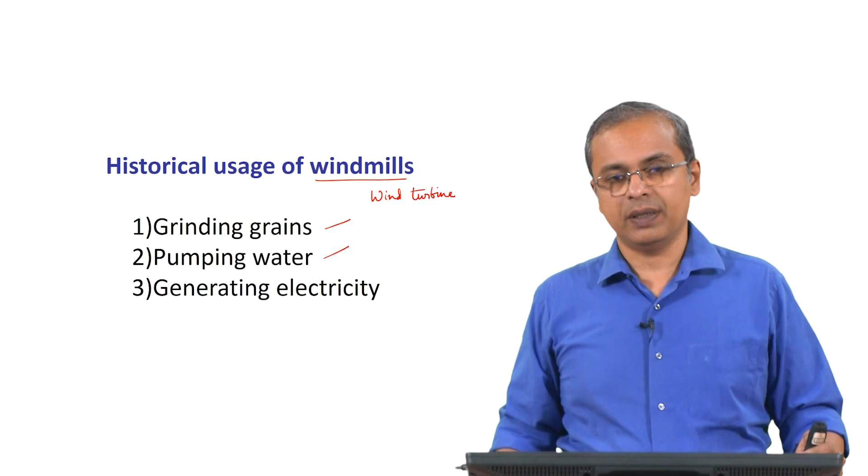In our homes, when we put pumps to pump up water from a sump underground to the tank above, because we are using electricity and we are conscious of those things, we go and switch off the pump; there is an overhead tank, we want to make sure that it does not overflow. If you just have a windmill to do that, and people can install small windmills on top of their house, it will take the water from the underground sump to the overhead tank without having to use any electricity.

If you just leave it on, it will just pump all the water out, and you may just overflow the tank. If the tank on top of your house has a lower capacity than the underground sump, which is most likely the case, then you will empty the sump, and you will be just overflowing water out the top. So, you have to be aware, because it is free, you just let it run and then it will just do its thing.

So, you have to be aware that it operates that way, and you should be ready to switch it off, so to speak, or stop it, put a brake on it and halt it. So, this is what it had been used for historically.

More recently, of course, it has been used for generating electricity, and that is why it is called the wind turbine, because eventually we have some generator there, and then you are generating electricity. So, in our context, largely we are looking at the electricity generation part of it, although notionally you could use it for any of these other purposes also. So, that is always possible.

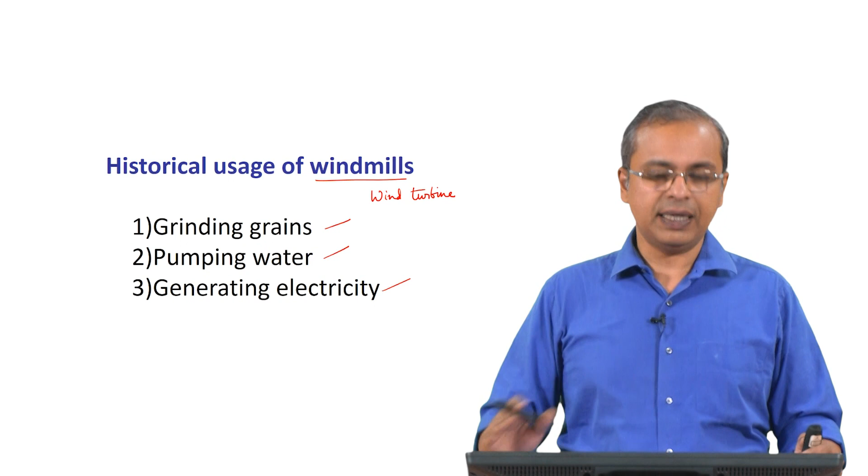Okay. So, that is the wind turbine, and these are the historical ways in which it has been used, and with that as our background, we will keep moving forward. So, what are some general requirements? Some general requirements for setting up this kind of a facility.

I mean, you may think you can set it up anywhere. Yes, indeed you can set it up anywhere. It will work with differing levels of effectiveness. So, there may be locations where it is just very minimally effective. So, if you want to get serious about it, you have to really look at the cost benefit analysis, right. You have put some cost to set up some infrastructure, what is the benefit you are getting from it. From a purely economic sense, that is the way you would look at it.

Of course, from an environmental sense, you have to look at the cost part of the equation as well as the benefit part of the equation in a much more elaborate manner. I think that is the key when people say you are ignoring environmental considerations. When you write that cost benefit kind of analysis, if you do not put cost to those things that are environmentally bad, then basically you are not doing a proper analysis. That is really what it means.

So, in the cost benefit analysis, you have to put in the idea that this is the cost for putting up this wind turbine or windmill. What is the benefit that I am getting out of it, or what is the benefit that society is getting from it. Therefore, you need to set up this windmill in such a way that it works well. If it does not work very well, then for the amount you have spent on it, the local people, maybe yourself or the people around you who are depending on the windmill, are not getting the benefit of the windmill.

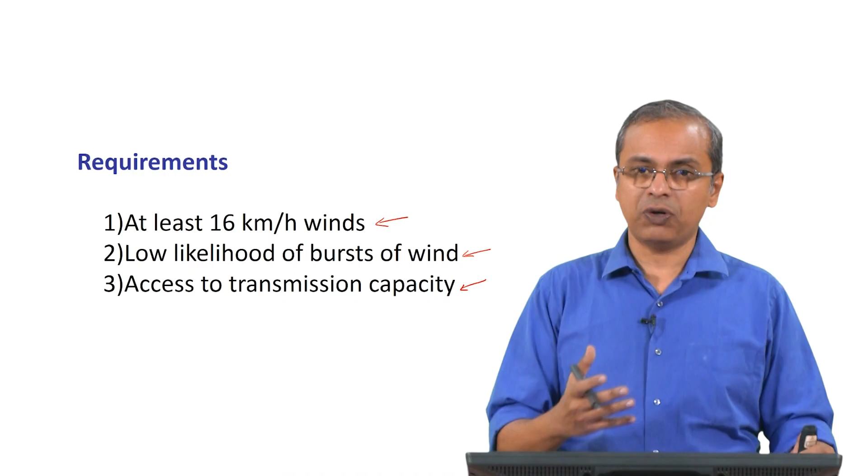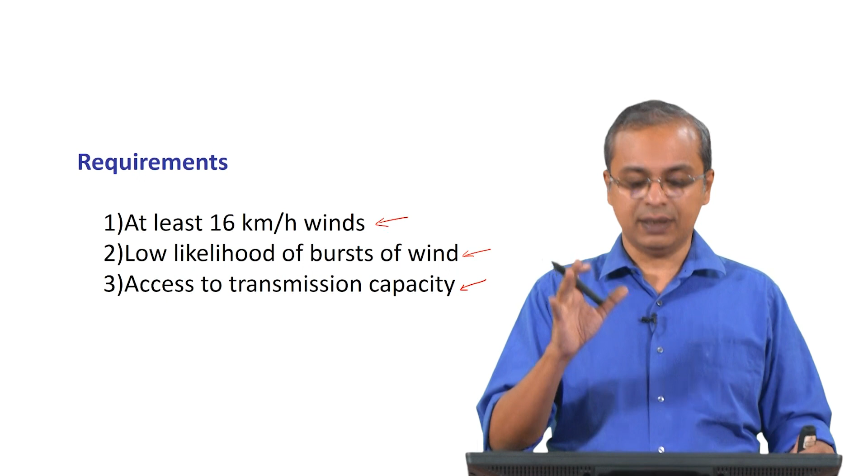So, generally in a more systematic way of going about doing this, they will look at all this analysis. They spend more than a year analyzing the wind patterns at a given location before deciding whether this location is good enough to set up windmills, because it is a fair amount of investment in the infrastructure and they would like to set it up in such a way that it really benefits everybody. Okay. So, a significant amount of site analysis is done before this windmill gets sited.

We are not too bad actually. We have our own approach to doing things. We do not force fit solutions. So, we have a certain system we follow to decide whether we are going to do something and then go about doing it, etc. We are right now the fourth largest in terms of wind power capacity and wind power generation.

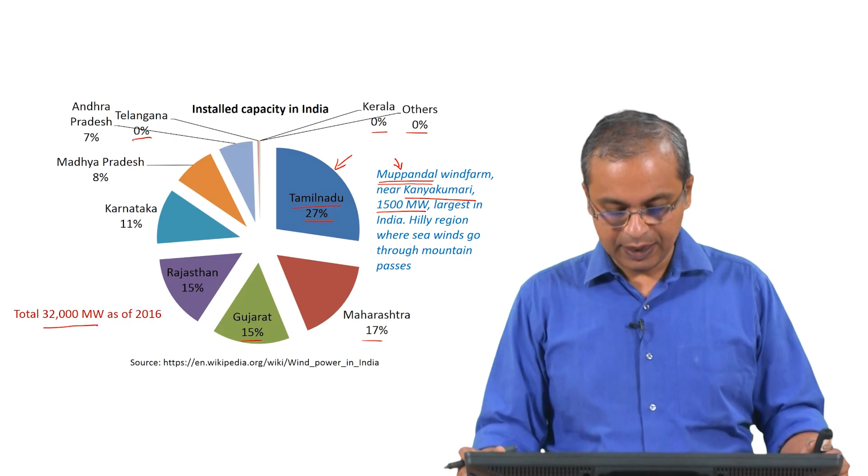And this is true internationally also. If you look at the various countries who are trying to push this technology forward, many of them are pushing in this kind of percentage, 15-20% growth. So for any industrial sector to be growing by 15-20% every year, for that industry it is a very promising sign. So all the capacity is built correspondingly, and that is a great sign to have. Okay, so that is what we are looking at.

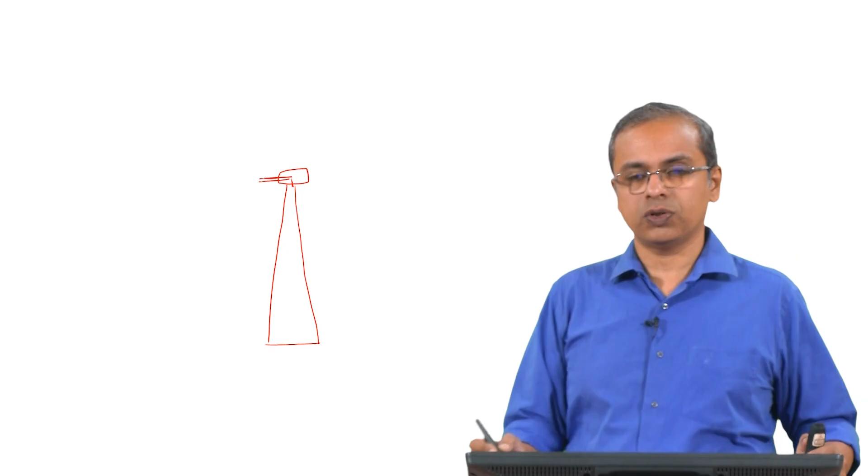We would have some kind of a tall tower, and then on that we would have some structure. From this you would have a shaft that comes out, and that is your horizontal axis. So something that is out here, and then from this you have the blades. Okay, so this is how this would be set up.

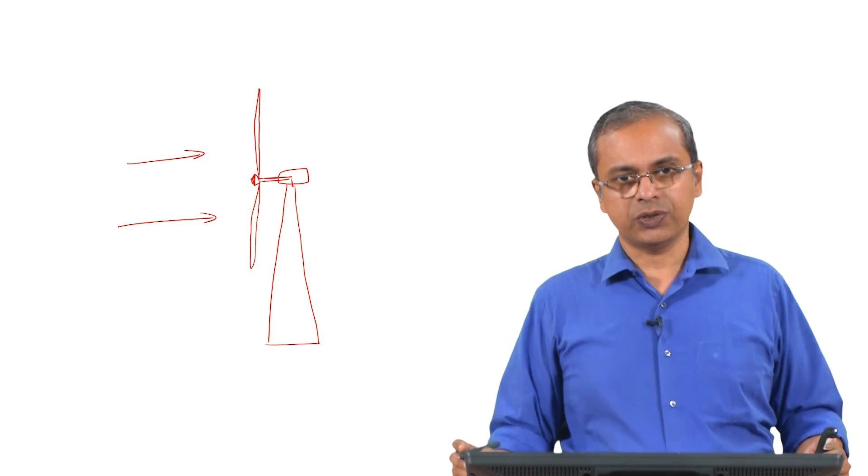So you would have wind coming in this way. The wind is coming horizontally, and then this turbine keeps rotating and generates electricity. So this is the general layout of a horizontal axis wind turbine. This axis is horizontal, and that is what they are referring to. Maybe the name does not seem significant to you, but when you look at the advantages and disadvantages, you will understand what we are talking about.

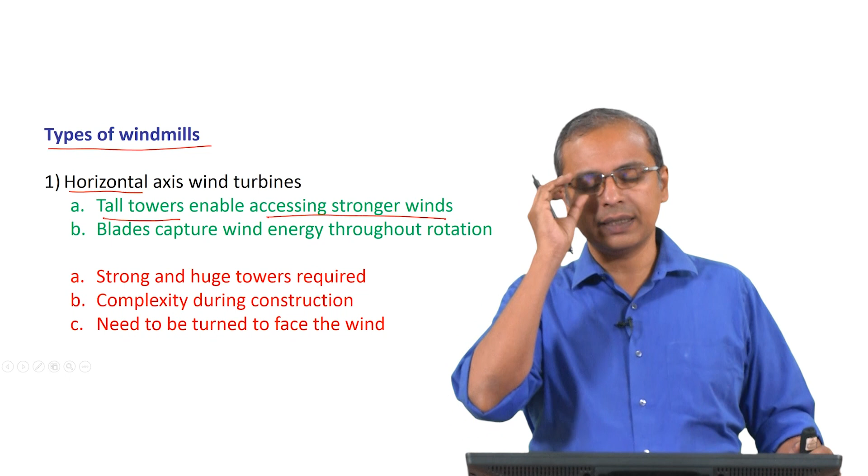What I have marked in green are the advantages. The first advantage is that the tall towers enable accessing stronger winds. You want to get good wind, and we are going to do some calculations later about why this is so important for us. We would like to access stronger and faster winds; at the ground level, you see more obstruction, even just the terrain will obstruct the flow of the wind, and so you do not actually get the strongest of wind.

So if you go up in any tall building, you can feel strong winds, and in fact in tall buildings you have to be very careful because doors slam very hard because of the wind that is there.

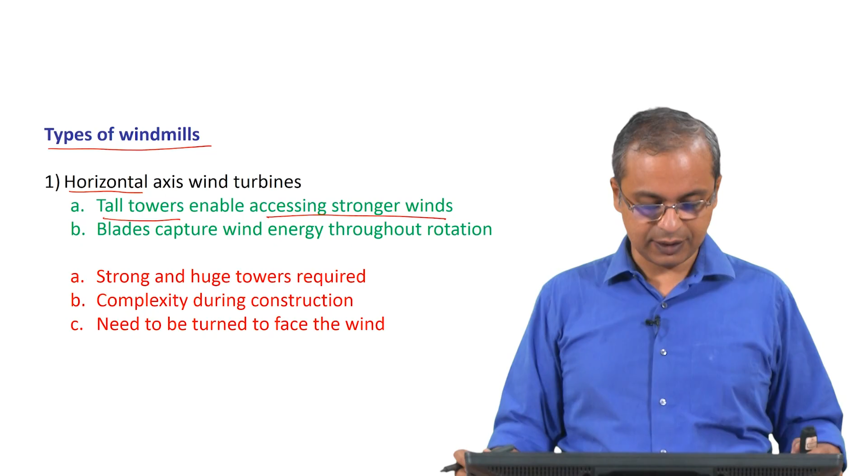Same building, if you go to the first floor, you will not have this problem. The stronger winds are there if you go up in height, and that's a plus because you are trying to capture that energy, and the blades capture the wind energy throughout the rotation. So this is a very important point.

If you see this bottom blade here, it does not matter where this blade is. It could be here, or it could have reached the top point, or it could be somewhere en route in its journey, rotating this way. Even as it is anywhere in the middle, if it were in this location...

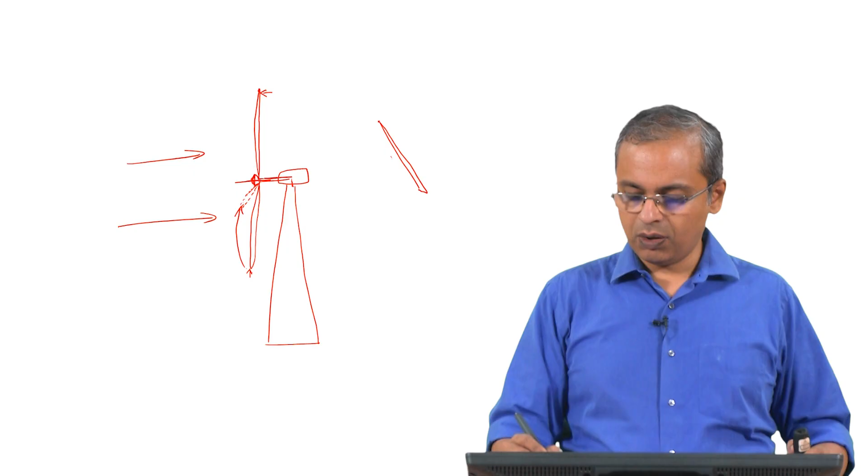Even at that point the wind is actually going to hit that blade and generate force and keep pushing the blade. It is going to move the blade in various ways, but the blade will keep moving because the wind is continuously interacting with it at any point in that circular motion. So it does not matter whether the blade is in this orientation, or that orientation, or this orientation. As the blade rotates, it does not really matter where the blade is, the wind is coming from the front and it will always keep moving all the 3 blades. That is the point we need to keep in mind.

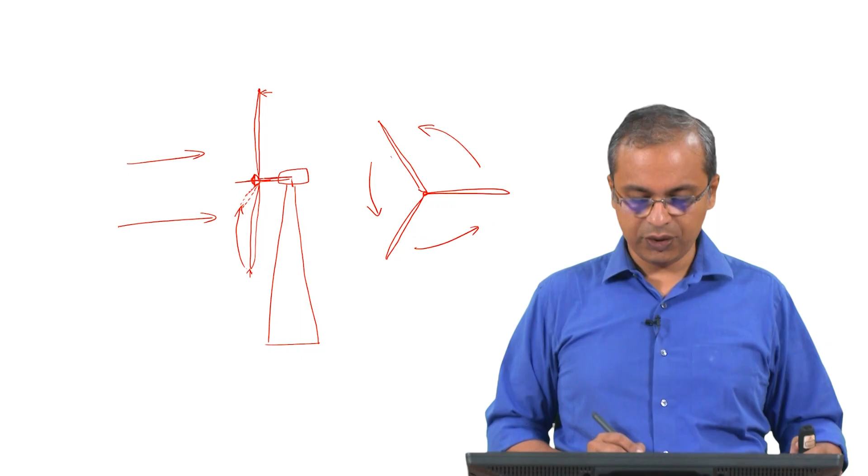But the disadvantages are that you need strong and huge towers when you set this up, because on this tower itself you have a gearbox and the generator. So this is where the generator is. A fairly heavy structure now sits on top of the tower, and therefore you need to have a very good, strong tower.

This becomes a necessity, you cannot do without a strong tower. And this adds to the complexity during construction, because that whole unit, the generator and everything, has to be lifted to the top of the tower and placed correctly. So it is a complicated construction, and it needs to be turned to face the wind.

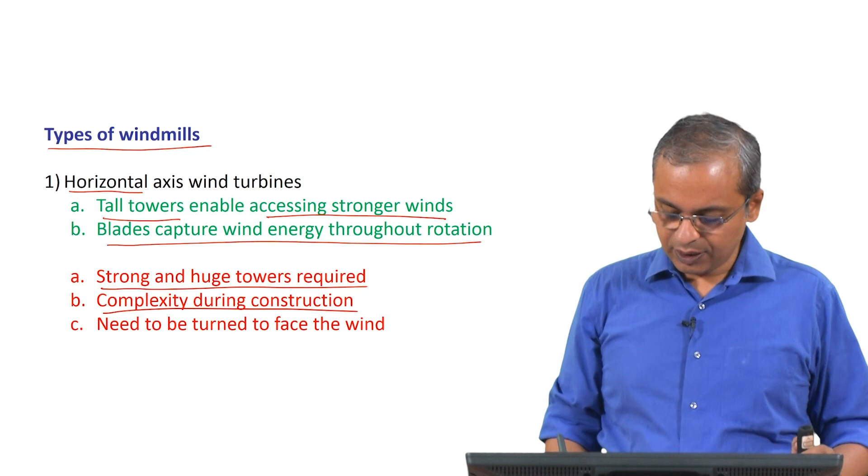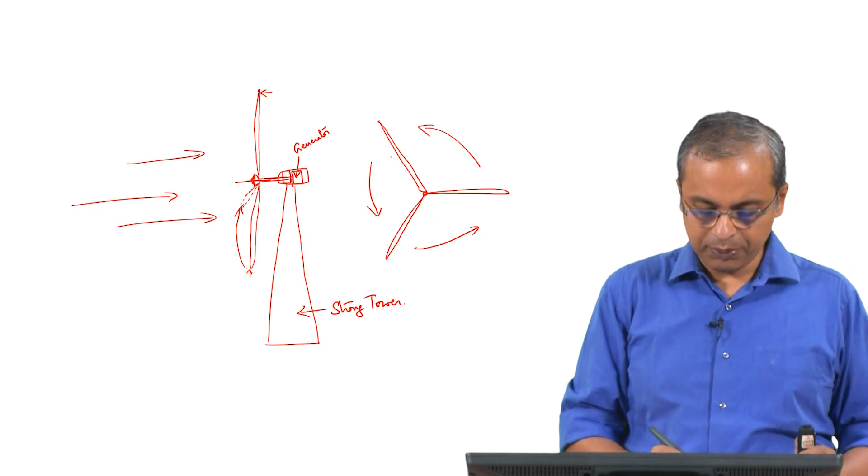That adds complexity again, because if the wind direction were to suddenly change - say the wind were to come from a different direction - you would have to rotate this structure so that the blades now face the wind. This entire unit along with the blades has to rotate so the blades keep facing the wind, and that is when you get the best benefit out of the structure.

It is an activity that you have to account for. You have to have a system with the correct kind of bearings, some active way to get it to rotate, some feedback loop which tells you which direction the wind is, and keeps it oriented towards the wind. So it's an activity you have to acknowledge and do, and that adds to the complexity of this structure. But in general, this is the more popular way in which windmills or wind turbines operate today. It has pluses and minuses, and that's what I wanted to share with you.

The other option you have is what is referred to as a vertical axis wind turbine. Again, as the name suggests, the axis of the turbine is vertical. There are very many interesting designs for this turbine. I am just going to draw one very simple type of structure to explain what we are dealing with. This is the axis of the windmill, with something at the base, and something that goes out on this side and this side, and in that you have... something like this is your wind turbine. So here on the base you will have the generator.

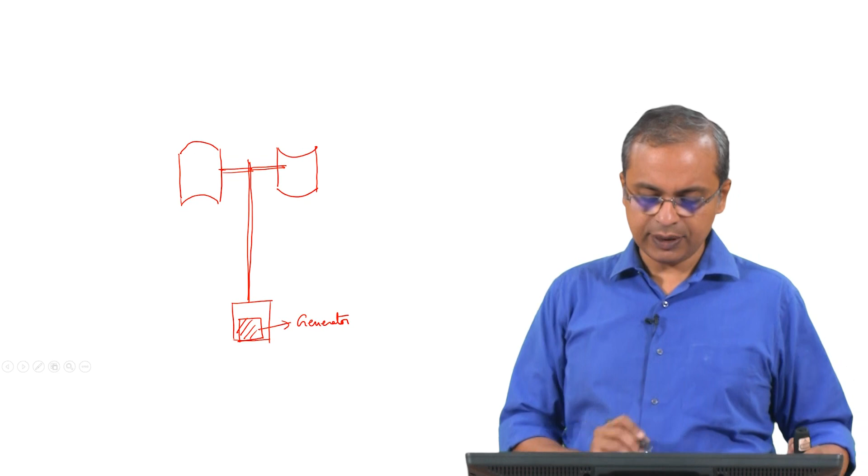Okay, so this is the kind where the axis is vertical. So axis is vertical, and that is what they are referring to. Now the advantages and disadvantages are like this.

One advantage is that it generates power independent of wind direction. It does not matter which direction the wind is coming, because the axis is vertical and the wind is essentially horizontal. From the perspective of the wind turbine, typically the wind is horizontal. So once it is horizontal, it does not matter which side the wind is coming from, because the axis of the generator, axis of the wind turbine is vertical, and since it is vertical, the wind is always perpendicular to the axis, it does not matter from which direction it is coming.

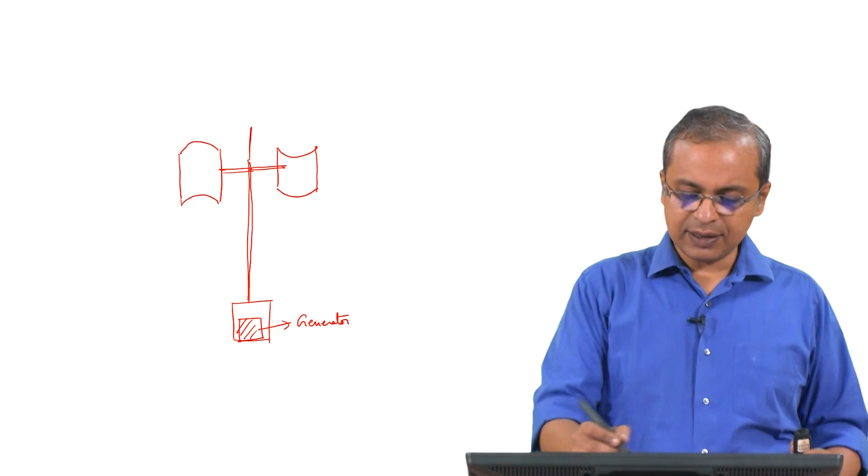You can see that here, because as this thing rotates, it does not matter whether the wind comes this way or that way, it does not really matter, the wind turbine will keep rotating, and you do not have to do anything to reorient it. So that is one big advantage.

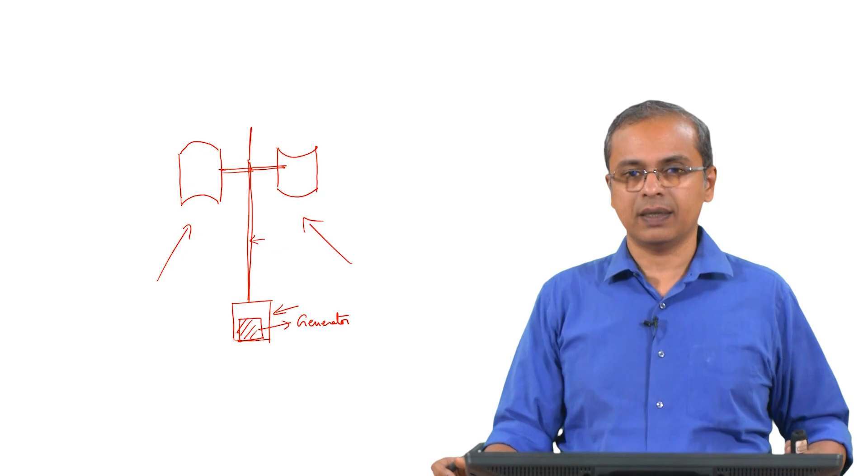It is low cost, partly because you do not need a strong tower, since the generator is placed on the ground here. Therefore the tower does not have to be any fancy tower, some basic requirements is all that it needs to meet, and then it is in a position to operate.

Disadvantages are that first of all, it is a little low efficiency type of windmill or wind turbine, mainly because only one blade works at a time. So why is this the case? If you look at the image, you can see.

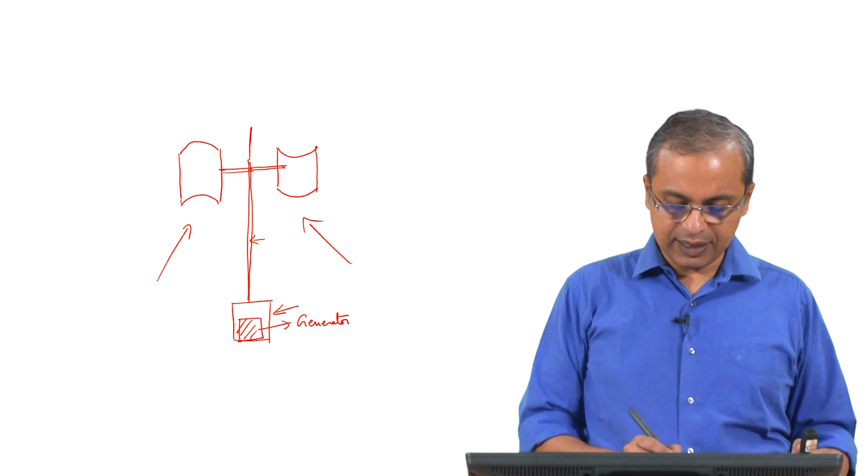Let us say the wind is blowing this way. It actually pushes this blade here, and then it runs off of this blade on the sides. So it does not push this blade as much, it pushes this blade more, and as a result it rotates this way. So effectively at this point, with these two blades available, only the blade on your left is the one that is actually pushing and moving the axis.

The blade on your right is actually not participating in the process, if anything it is providing a slight resistance. So it is not effectively participating, and therefore in terms of capturing energy, this is less efficient, you are actually wasting some energy.

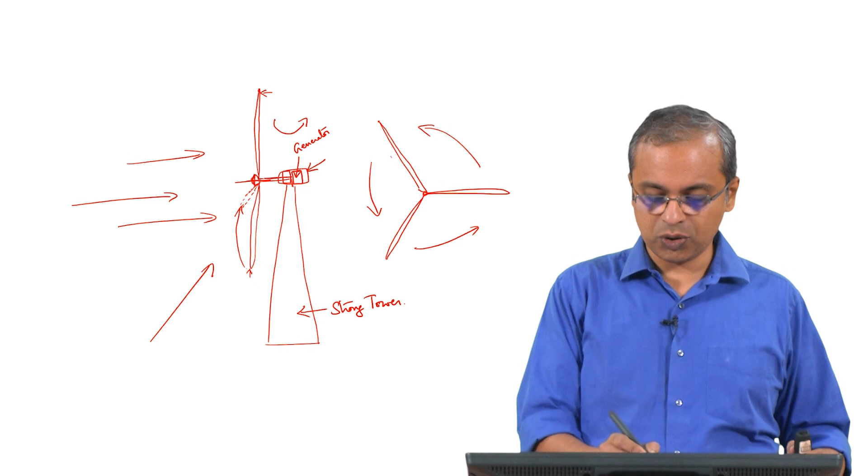Whereas with the horizontal axis windmill, where the axis was horizontal, all the blades were always reacting to the wind, it did not matter which position the blade was in. Whereas here, as long as this blade is here, it does not respond to the wind. When it rotates around and comes to this location, it will be the one getting pushed, the other one will stay benign. So only one blade operates at a time, and therefore it is less efficient relative to the horizontal axis wind turbine.

It may need wires for support, depending on the structure, because it is a very thin structure. Usually they will have some system by which they take this shaft and tie it to the ground in about three places to keep it stable, so that it does not topple. That is activity that they would have to do.

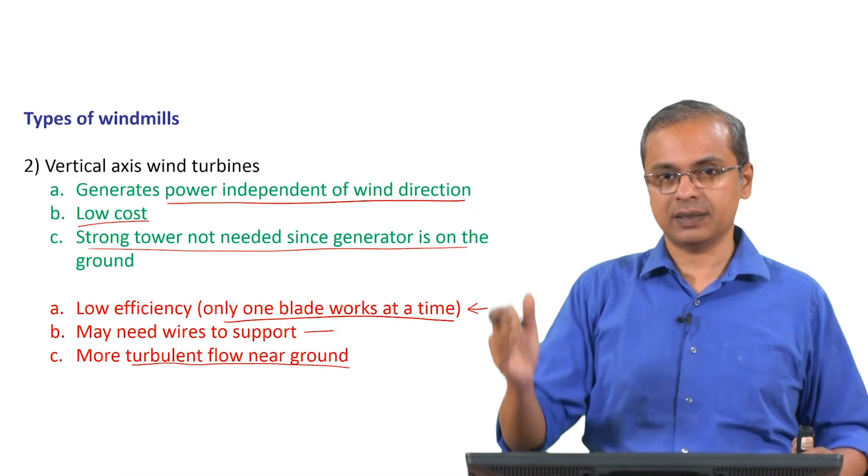Since it is at a lower location, generally there is more turbulent flow. It is not a very smooth flow of air, because there is resistance from the ground, the air bounces off the ground. So instead of the air going flat, it may suddenly go up and come down, and you will have air movement in different directions closer to the ground because of various obstructions, so the flow is much more turbulent, not very smooth laminar flow. So these are some disadvantages of vertical axis wind turbines.

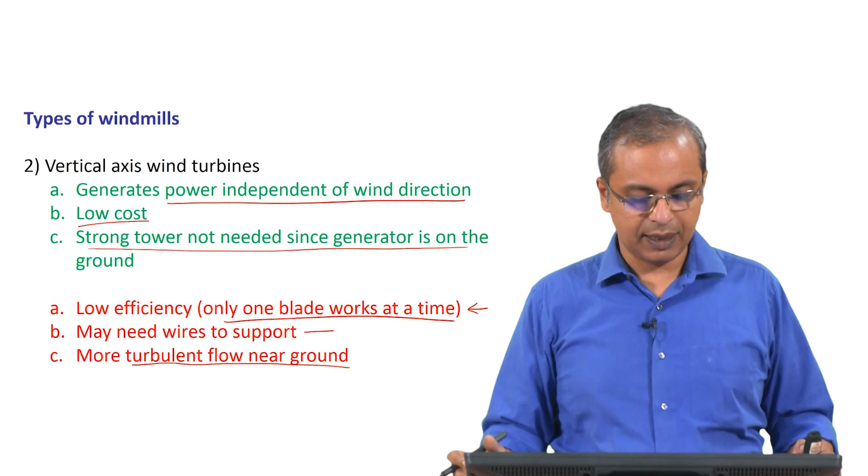Just to give you an idea, let us look at the power generated. If you look at commercially sold wind turbines, some of the large ones being sold and installed internationally these days have capacity on the order of 2 to 3 megawatts. As of today, that is the capacity of the larger ones. You may find ones less than this, 1 megawatt, even 500 kilowatts may be there. These are the slightly larger ones, so if there is a large scale investment, maybe they are using these larger ones.

So, let us look at what it generates per year. We have something called 25% capacity factor. What this means is that even though we are rating it at say 2 megawatts, because the wind varies through the year, through the day, it is not actually going to give you 2 megawatts consistently. There are times it is going to give you a lot less, sometimes closer to 2 megawatts. So this factor simply says on average it is giving you 25%. That means, after you average it across a significant period of time, you will be getting 1/4 the capacity it is rated for.

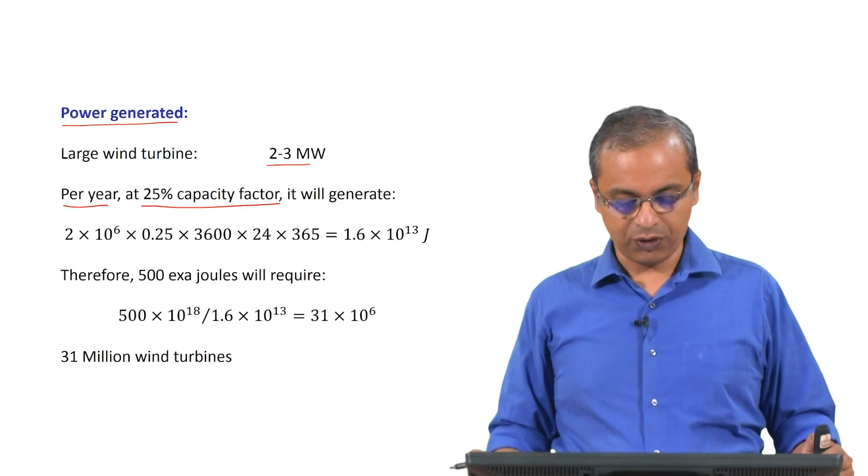So in this case you will get 0.25 into 2, let us assume we are working with the 2 megawatt wind turbine. So you will get about 0.5 megawatts is what you are going to get.

So if you take this and calculate what we are getting through the year: 2 megawatts, 2 into 10 power 6, into 0.25. We have 3600 seconds in an hour, 24 hours in a day, 365 days in a year. You multiply all this, you will get 1.6 into 10 power 13 joules.

We already said that humanity is using 500 exajoules per year, so that is 500 into 10 power 18 joules. If each wind turbine is giving us 1.6 into 10 power 13 joules, how many turbines will you require? Well, it turns out you will need 31 million turbines.

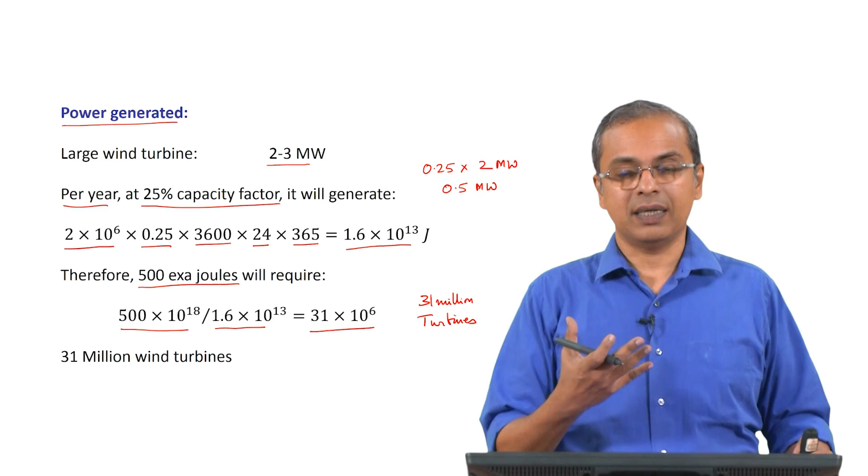Assuming nothing else changes, this is all we are going to do, using today's usage, today's windmill capacity. In reality these numbers will change. You may get better wind turbines, higher capacity wind turbines, our power usage may go up, or we may have more efficient ways of using power so usage may come down. We do not really know all that, so just using today's values, this is the kind of number we come up with. If you actually put up 31 million turbines around the world, you can take care of the entire energy requirement of humanity. I just wanted to do this calculation so you get some idea of the number we are talking of, so that is the number we have, 31 million turbines.

So how much area will this require? That is another thing we have to look at. Generally what they say is that you cannot keep wind turbines very close to each other, because when one wind turbine is rotating, it impacts the flow of air just past it, and if you keep the next wind turbine right next to it, the second wind turbine works very ineffectively because it is getting a very bad flow of air that is not back to its normal sense. So normally the rule of thumb is at least 7 times the diameter of the windmill should be kept between two windmills, and only then you are reasonably sure that each windmill is roughly acting independently.

So it turns out that roughly you are looking at about 500 meters between turbines, that is the kind of distance you would like to keep so they do not impact each other negatively. Some calculations have shown, if you actually go to the ground and see what people have set up, various wind farms that have been sited and mapped and distributed across the site, it seems like you need about half a square kilometer for each wind turbine. You set up a wind turbine, so half a square kilometer around it you should not site another one, you should keep it past that point. So we are really looking at, if you look at half a square kilometer per turbine, you will need about 15.5 million square kilometers.

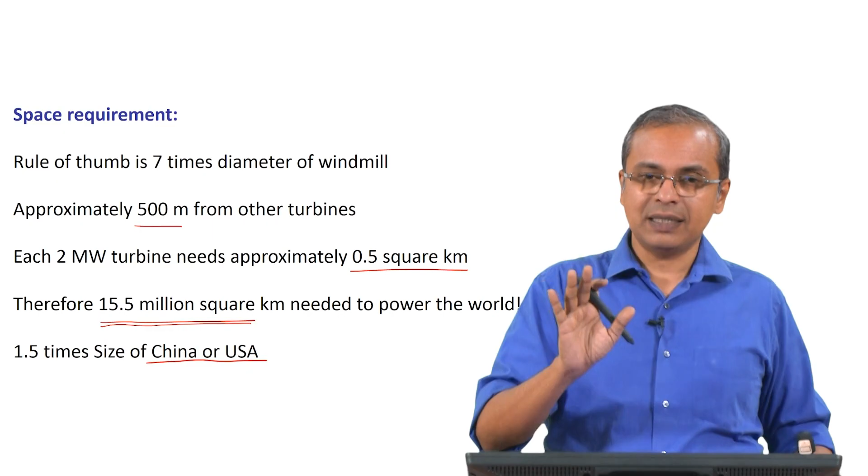So, you should be able to put it on top of tall buildings or something. So, you have to design buildings where on top of the building you can set up a windmill. You get the height because you already have a tall building, and on top of it you can set up a windmill. Already there are buildings of that nature. There are buildings where on the top of the building they set up a windmill and it generates enough or more than enough electricity to power the entire building, right. So, that is always an interesting thing to look at.

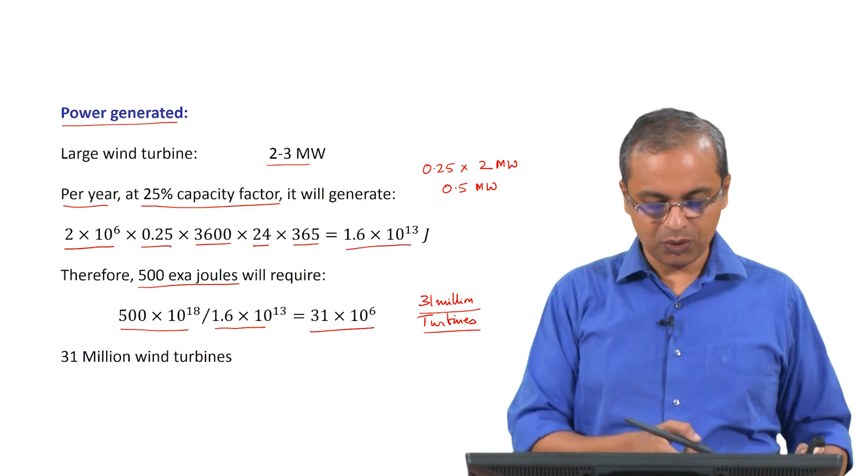So, for example, when I say 2 megawatt turbine at, sorry, 25% capacity, right. That is what we said here, 25% capacity factor. So, we are looking at 2 megawatts giving us 500 kilowatts, right, as opposed to 2000 kilowatts. 2 megawatts would be 2000 kilowatts, and from that we are getting a quarter of it. So, 500 kilowatts we are getting.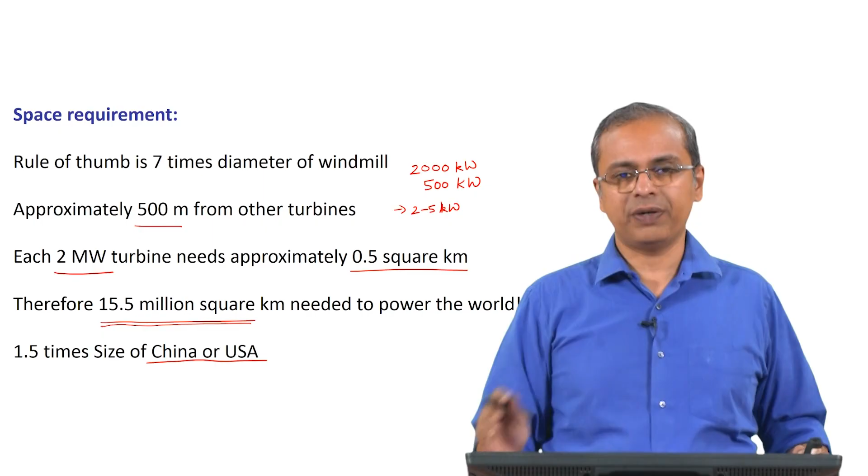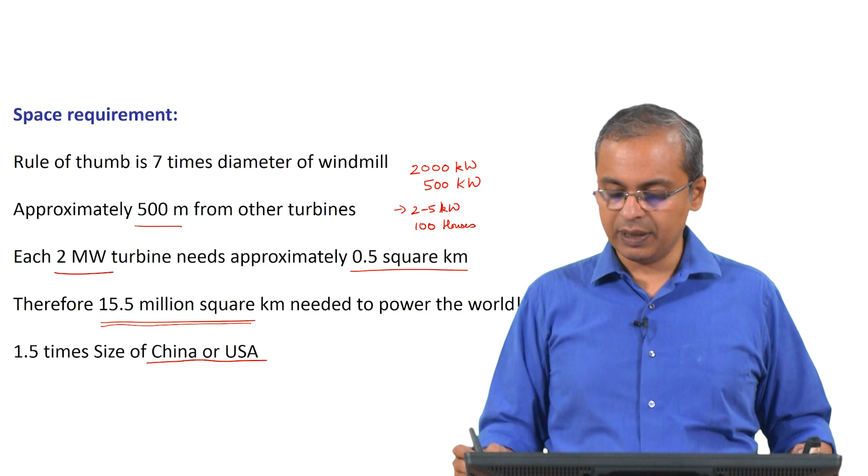So, a house, as I said, will typically need anywhere from 2 to 5 kilowatts, right. So, we will say 2.5 kilowatts per house, or even if you take 5 kilowatts, you can power 100 houses, right, 100 houses can be powered. If you take half of it, you can power 200 houses.

So, basically if you put a wind turbine on top of a tall building, say a 50-story building, a 100-story building, with the right capacity, there you are going to get very strong winds. So, your capacity factor may be much higher than 25%. If you do that, the entire building can be powered by just that one wind turbine on top of the building. So, clearly there is a model there, you can construct various buildings, on top of them you can have appropriately sized windmills. So, you are not losing that area.

When I say 15.5 million square kilometers, that area is not lost. You have built a building there, and on top of the building you have placed it, like, for example, these days they are placing all these towers for mobile phone signals, which are being sent off of towers on top of all sorts of buildings.

So, you can do a combination of all these things. You can have a windmill, you can have a tower which is also doing all these communication signals, although they may have some interference, we do not know about that, but all these models are possible. So that you are generating power in a clean way and no transmission loss, because you are more or less powering this building right there. So, you do not have to transmit somewhere and have all the transmission losses, transmission infrastructure is avoided. So, that also saves cost.

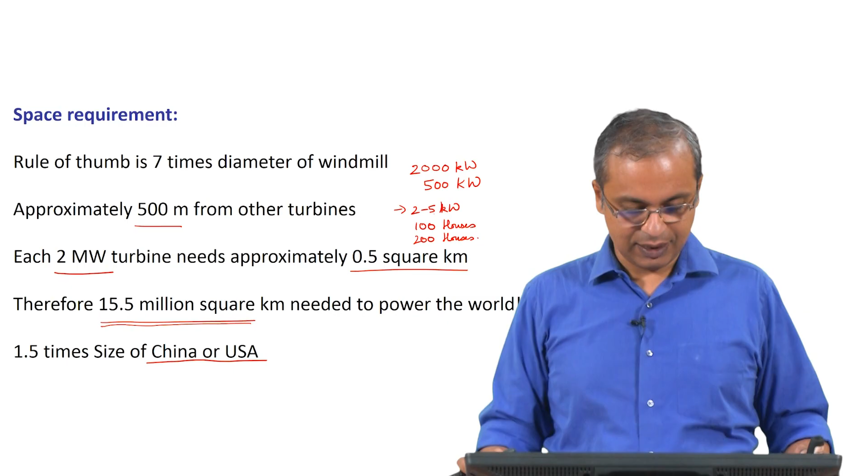So, many factors are there which are very interesting to look at and can be considered when you look at this kind of a picture, right. So, this is something that is very interesting to look at. So, let us look at the conclusions here.

First of all, there is considerable interest in tapping wind energy both internationally as well as in India, and that is strongly seen by the fact that even in 10 years time we have grown 4.5 times, which is huge. I mean 450% growth is massive growth in any sector in 10-year time. Every year we seem to be growing about 15-20% relative to where we were last year. And this trend is being seen in many countries. Any country that has gotten into this seems to be actively pushing it.

Geographical locations play an important role because as we saw, this Muppandal area where they have set up this large wind farm is because geographically it is like that. The wind flows there strongly and it is able to get you the kind of energy that we are interested in capturing more effectively, and therefore that is a nice place to site it. And so therefore you have to plan a little to site the windmills so that it really gets you the energy that you want. And also I told you there are a lot of interesting models, you can set it up on top of buildings.

So it mixes up both the fact that you are living in a place and the fact that you are generating electricity right above that place, and you make yourself self-sufficient, you make yourselves environmentally free, clean, you make yourselves very efficient. Many times half the electricity bill that we are paying is for the transmission cost, not for the generation cost. So, the transmission cost is gone, so you are getting cheap electricity. So, you can power your building and you can power a neighboring building, so that is great. So, many such things that can be looked at.

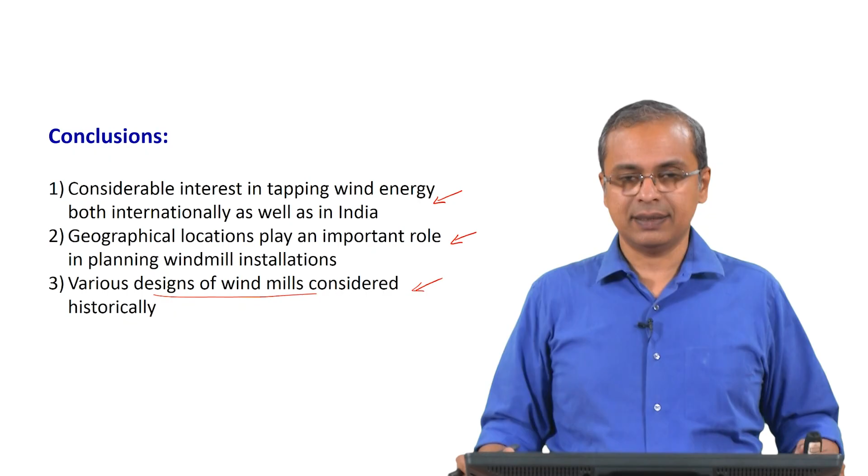And also these designs, as I said, a wide range of designs have been considered, many new designs are also being considered. They may have their own pros and cons from any perspective. It could even be a psychological perspective of the people who have those windmills installed in their locations, because as I said, there is some level of resistance and reluctance to these technologies because they sort of impact the view that you get of the place when you see these large farms of windmills that have been set up. So, a number of things to be looked at and we will look at them as we go forward, but for today this is your introduction to wind energy. We will take it from our next class.